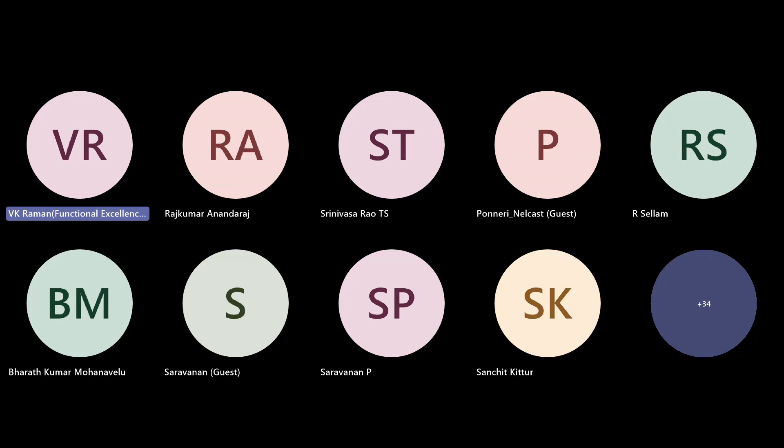He is a member in Indian Institute of Metal, Technical Committee member of Institute of Indian Foundrymen Coimbatore Chapter, Environmental Committee and Executive Member of Coimbatore SIDCO Industrial Estate Manufacturer Association, Member of Program Advisory Committee of Department of Foundry Technology PSG College, member of Board of Program Advisory Committee of KPR Engineering, member of Board of Program Advisory Committee of SNS College of Engineering, and Management Committee member of SCE Engineering Chapter.

He has almost visited across the globe: USA, Germany, Italy, Czech Republic, France, Sweden, Norway, and Denmark. He has got the interest of learning and teaching solidification science of metals. So there is no other leftover, sir, all the areas are covered. So now I request Dr. Saravanan sir to take the presentation thereon. Thank you, sir.

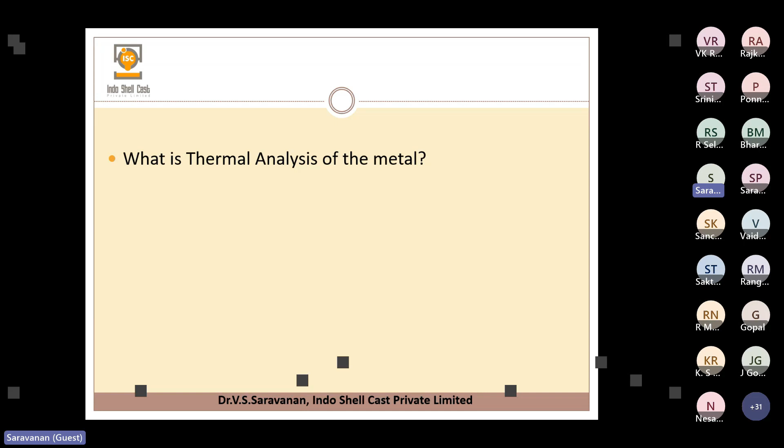So what is actually a thermal analysis? It is nothing but analyzing and predicting the solidification behavior of the metal through interpretation of shape and arrest points of the cooling curve of the solidifying liquid metal. So this is a small definition. Here again there are some wordings, some solidification behavior and then cooling curve. So what do you actually mean by the solidification behavior?

This cast iron, particularly ductile iron, is a very sensitive metal towards process parameters, so sometimes we cannot predict its solidification. Even in an established process, all castings may come out okay one time, and another time we get 10%, 20% shrinkage, even though the process parameters look the same.

We could not find out the exact reason for this shrinkage. Basically, if there is any shrinkage issue, we analyze the gating system, the risering system, increase the riser, change the sleeve, something like that. So it is a real headache for the engineering department. But what has created this shrinkage issue?

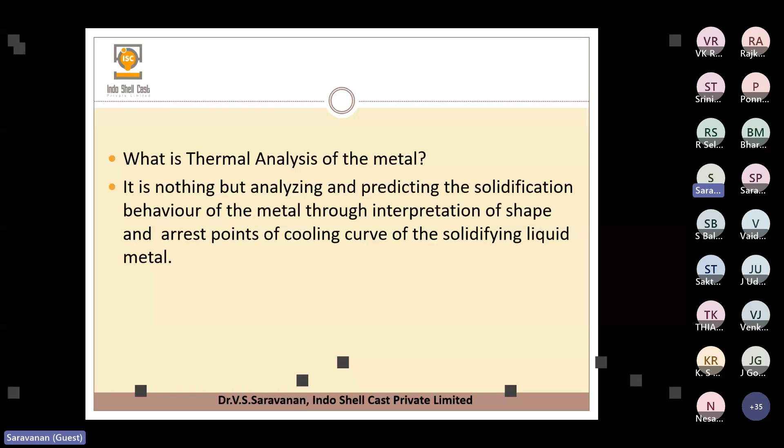For that we need to closely work with this software. Many foundries, when they initially bought this thermal analysis software, put the metal into the cup and it showed some reading. The analysis shows it is good, but actually they get a problem. So immediately we lose faith in this software. But it's not like that - we have to work with the software, fine tune it, adjust the slopes according to our metal, and then slowly start our prediction. This is the thermal analysis and the problems we face in foundries.

We have almost all the foundries having the spectrometer, which gives all the chemical composition. Yes, of course it is very important. The quality of the metal and solidification behavior is mostly related to the chemical composition. As carbon and silicon increase, the solidification pattern will change. So that is one thing.

But apart from that, sometimes even if all the chemical composition is as per specification, we will still have problems. What kind of problems? Metal holding due to power cuts - it is unavoidable, and it will affect the quality of the metal. How to improve the quality of the metal to some extent, because once the metal is deteriorated we cannot bring it back to the original, but we can improve it to some extent.

Sometimes metal holding happens because of other reasons - maybe molds are not ready when the metal is ready, or there are breakdowns, or the operator is not available at the time of metal readiness, so they search for persons inside. Sometimes this happens during the night shift. These kinds of delays will happen, and this will actually deteriorate the metal quality.

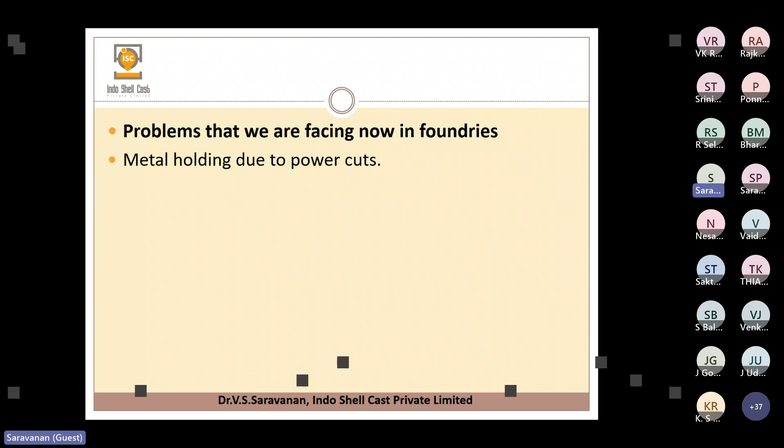Sometimes the chemical composition correction also delays the metal preparation. We want to correct the metal as per the chemical composition requirement, so we need to add some alloying elements, correct the metal, and again do the spectro result. This will actually take some time.

Then there's superheating of the metal - this is a very important thing. We should not superheat the metal because it will kill the nucleation potential. Sometimes we don't know whether we are superheating the metal or not. Maybe 1500 is the optimum temperature, but it goes up to 1530. We don't know whether the metal reached 1530 until we measure the temperature. Then we reduce the temperature to 1500 and start pouring or treating the metal. But having reached 1530 has already killed the nucleation potential. Reached is reached - so how to control this and how it has affected the nucleation potential is one area.

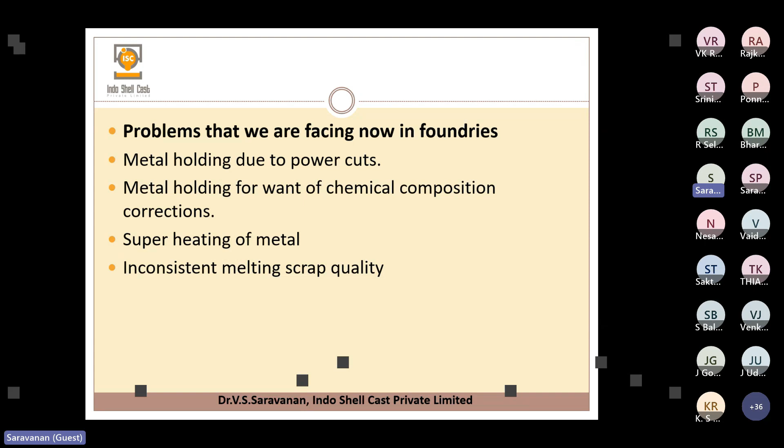Then there's inconsistency of quality scrap. We are buying scrap from different sources, so we do not know the quality, because even checking the chemical composition only gives the important elements - maybe 20 or 25 elements. Apart from that there are many other things. Even the recycling - how many times the scrap has undergone recycling - we don't know. These things will affect the quality of the metal. Sometimes we put rusty scrap also. Normally we put shot blasted scraps, including runners and risers.

Sometimes if it is CRC scrap or rusty scrap, we don't know what's in it. We have to put it as is, and the scraps will have not only rust but sometimes some coatings also. So once we put the scraps inside the metal, only then we come to know there are some coatings, because of the fumes and different color flares, all those things.

And then poor melting practice - from the charging sequence, how to melt. We should not do very fast melt rating, all those things. So charging sequence is also important - how to add the charge material, where to add the carbon, silicon, all those things. And the inoculation practice, how we are doing it - these things actually decide the quality of the metal.

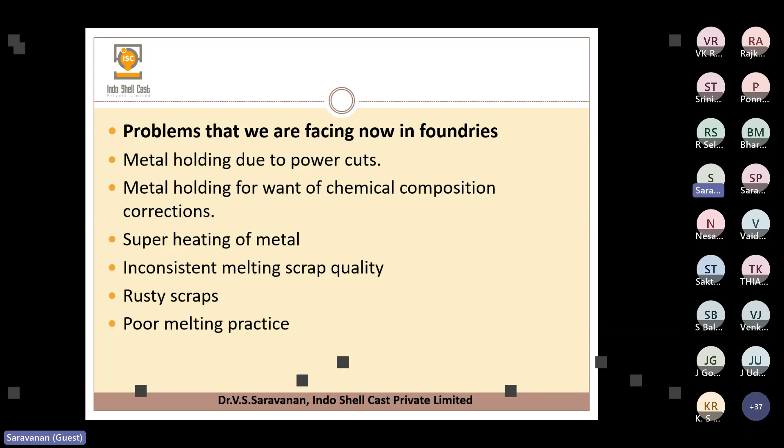So these things actually will not reveal in our spectro analysis. Spectrometer tells only the chemical composition. So here, we can find out these things to some extent with the thermal analysis software. All these inconsistencies will give these results.

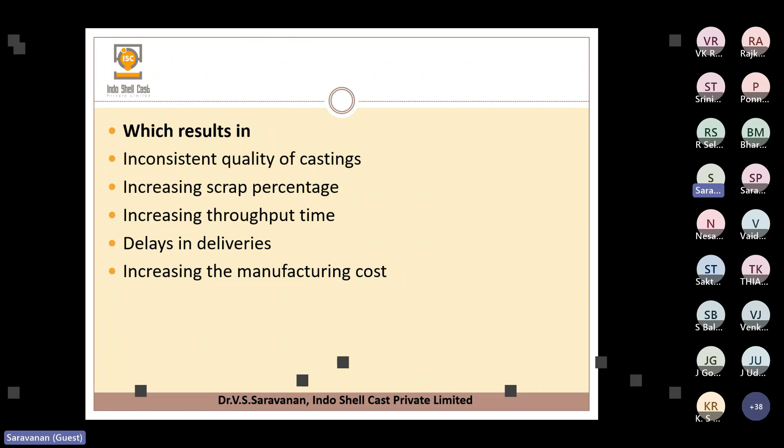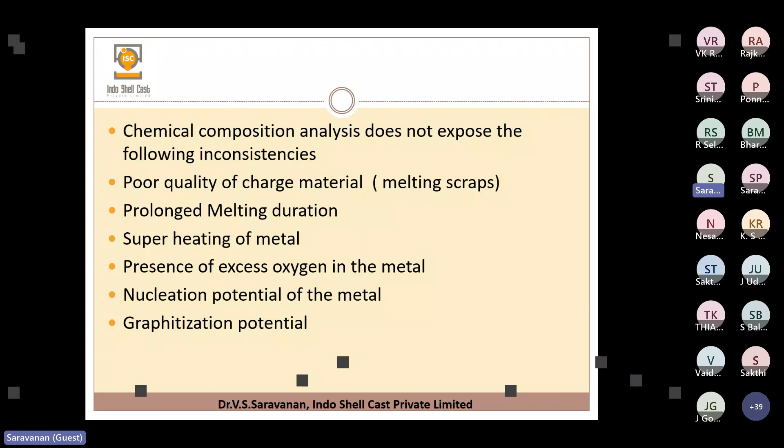So inconsistent quality of castings, increasing scrap percentage, increasing throughput time, delays in deliveries, increasing manufacturing cost - these things. Chemical composition analysis does not expose the following inconsistencies: poor quality of charge material, prolonged melting duration, superheating, presence of excess oxygen, nucleation potential, graphitization potential - all those things, it will not come in spectro analysis. So we can get the answer to all these things from the thermal analysis software.

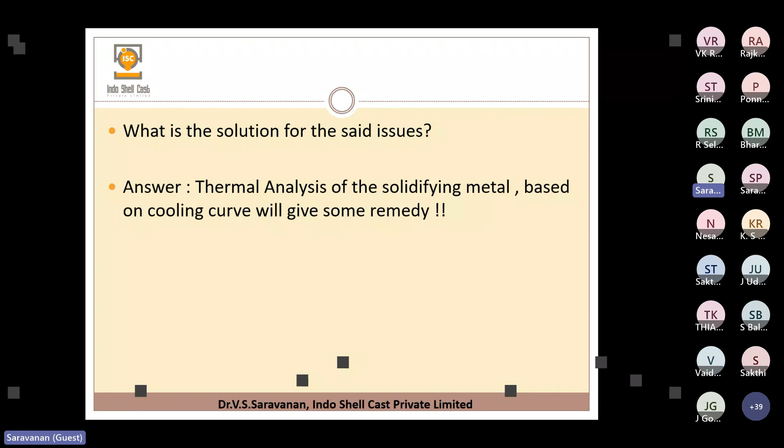So now what is thermal analysis software? Actually this is a little bit like a CE meter. We are using a pouring cup - we pour the metal into that, and there is a small thermocouple inside.

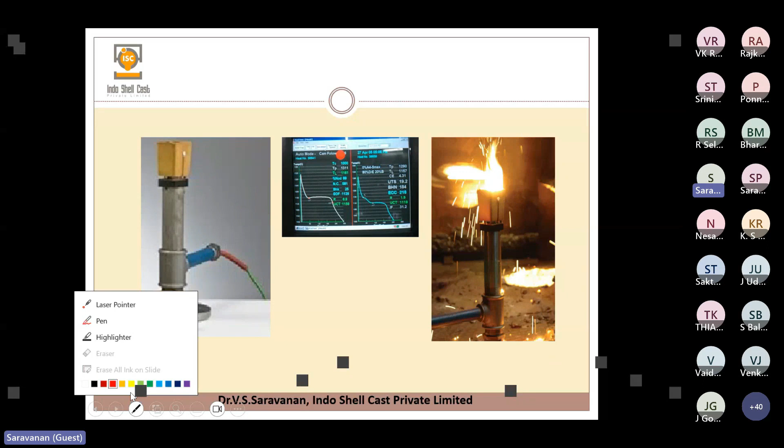So the thermocouple will generate millivolts. This millivolt signal is converted into a digital thing, and we take it into the software, and the software will plot the cooling curve according to the millivolt generation. For each millivolt there is a standard temperature, and based on that they plot the curve.

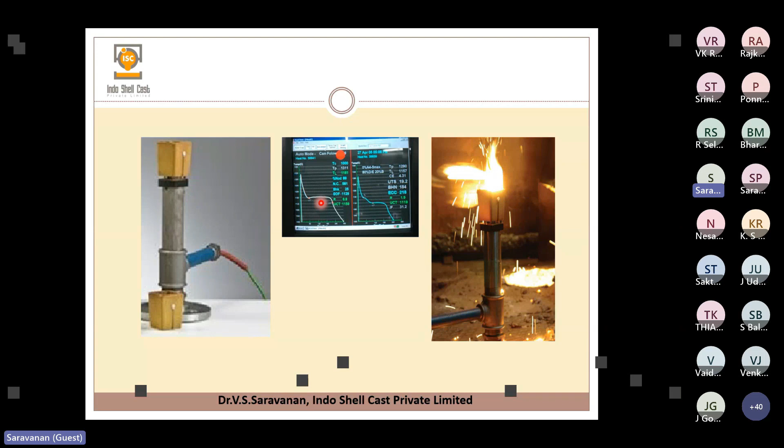So the shape of the curve, how it is, what is the time taken, and where the arrest points come - based on that the software gives a lot of inputs for us. By studying these inputs, we can predict and tell the nucleation potential of the metal to some extent.

So this is actually the thermal - this is the thermocouple. There are two types of thermocouple cups: one is the plain, and one is the tellurium coated cup. Once we want to check the base metal analysis, we have to use the tellurium coated cup.

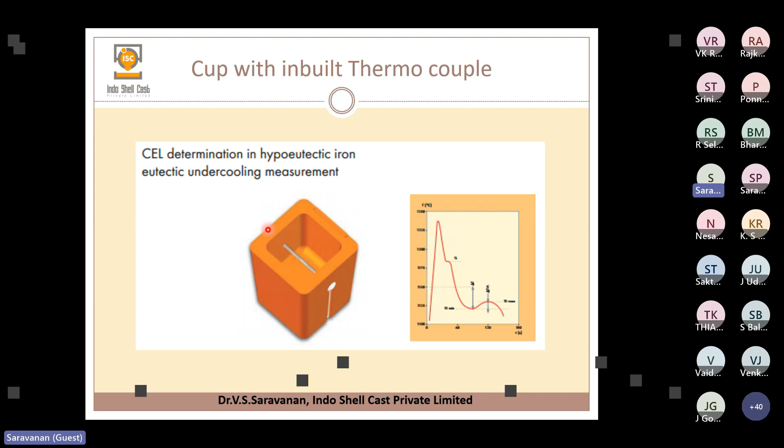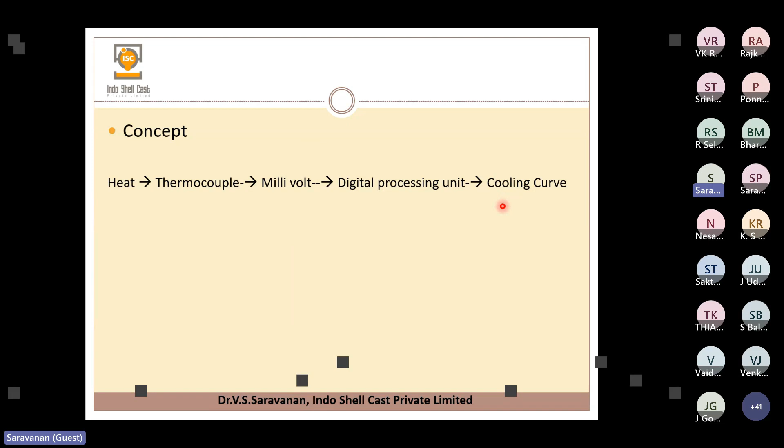So once we pour the metal, it immediately cools because of the tellurium - it forces the cooling, and then we can get the base metal readings. So the concept is the heat generated inside the thermocouple - the thermocouple produces the millivolt, and the digital processing unit converts the millivolt into a temperature scale, and plots the cooling curve.

So this is the general cooling curve, for the pure metal. For pure metal we have only one point - the melting point and the freezing point are both the same.

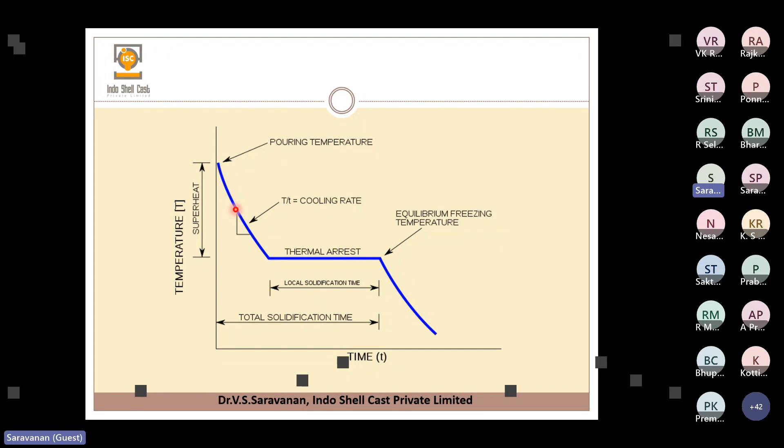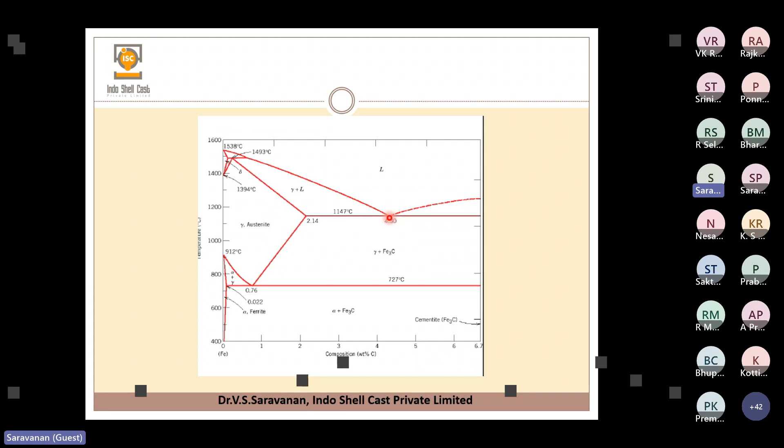So I will just skip here. You can see this is actually the 4.3 eutectic, and this is 1147, this is the eutectic temperature, and this is the eutectic composition. So the thermal analysis and all these things are derived based on this carbon equilibrium diagram.

So now, before going into the thermal analysis software, let's look at the solidification - how it is happening inside the metal, what are the phases. Once the metal is ready in the liquid state, in the course of time more nuclei will form. So as the nuclei form, the metal slowly loses its kinetic energy, because the more amount of elements inside the metal, it is moving very fast.

When the temperature increases, the movement is very fast. Once the temperature goes down and down, the kinetic energy between the elements slows down, and they come close together and bind each other - because as we studied in schools and colleges, ionic bond, covalent bond, so many things - whenever the atoms come close to each other, they bind and create the solid phase.

So here more nuclei will form, and slowly the nuclei will group together and grow as dendrites. The dendrites will grow and finally become solid, and we can see the grain boundaries also. So our point here is: where does nucleation start, at what temperature, and how much nuclei is actually created inside the metal - whether it is sufficient to continue for the further solidification process. These things are very important.

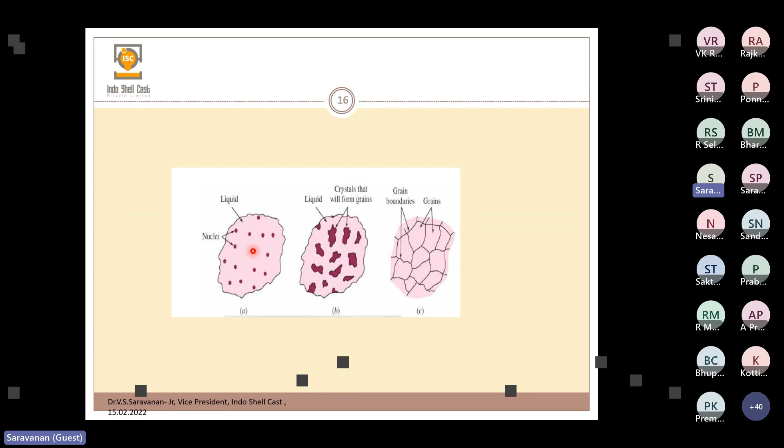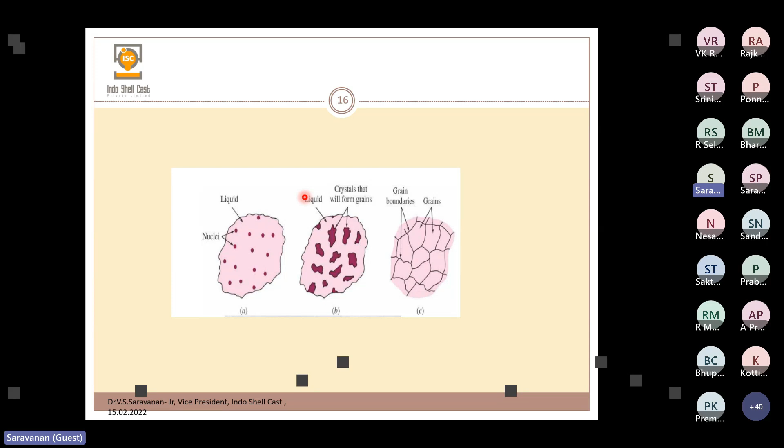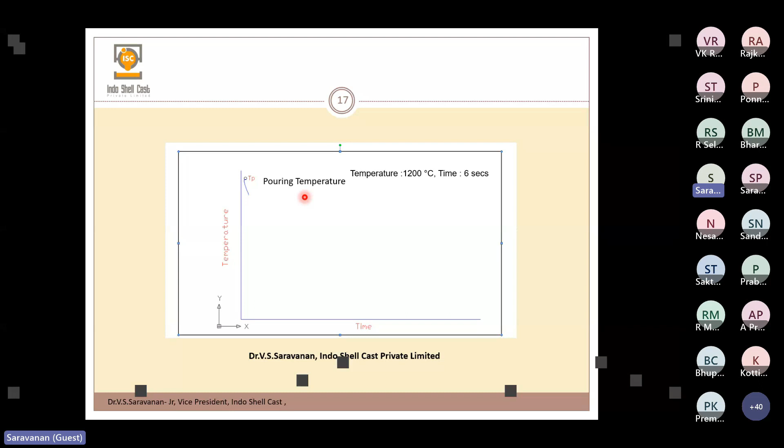Sometimes the metal takes more time for getting nucleation. Then there are problems in quality - shrinkage or porosity will come. So once you pour the metal, for example into a cup, at the pouring temperature you can see the arrest points. I already told you about arrest points - it is actually a constant temperature at that particular point. There is only a phase change, no change in temperature.

So in the cooling curve, it will show only the arrest point, like this. But if you enlarge that particular time, if possible - normally the cooling curve software cannot zoom it, but if you are able to zoom that particular point, you can see a small straight line, because there is only a phase change, no temperature increase. Like when boiling water, once it reaches 100 degrees centigrade, the boiling point, the temperature remains constant and only the water becomes steam.

So like that, a small phase change happens here because the metal becomes a small solid phase. The temperature remains the same, but this particular point, the pre-arrest point, is not permanent. Once a small amount of nuclei is formed everywhere, the latent heat liberation takes place, and then again the temperature of the metal goes up a little bit, and then it dissolves again.

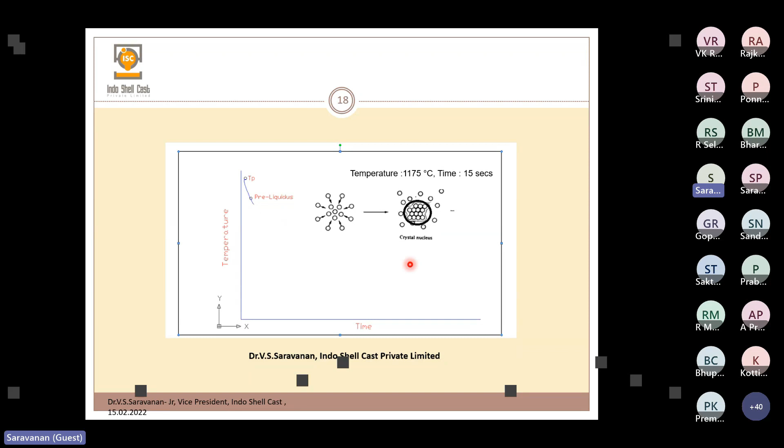So that is called here. This is not a permanent one - this particular pre-liquidus arrest point. So this is actually called the pre-liquidus arrest. What happens here is once the nuclei form, it will dissolve again at this particular point.

This pre-liquidus arrest point shows excess oxygen sometimes. The source of oxygen can come from rusty melting scrap, furnace lining, coatings, or moisture somewhere.

If excess amount of oxygen is there, the metal cooling curve will show this small pre-liquidus arrest point. So if we have the pre-liquidus arrest point, it shows more amount of oxygen, and we have to remove the oxygen by adding deoxidizers.

So this is one important thing - excess oxygen is not desirable. If there is excess oxygen, maybe 100 ppm or something like that, it will create issues like taking more magnesium during magnesium treatment. Magnesium oxide inclusions will come, magnesium pickup will not be there, and the nodularity percentage may come down. Sometimes gas defects, micro gas porosities inside the metal will also occur.

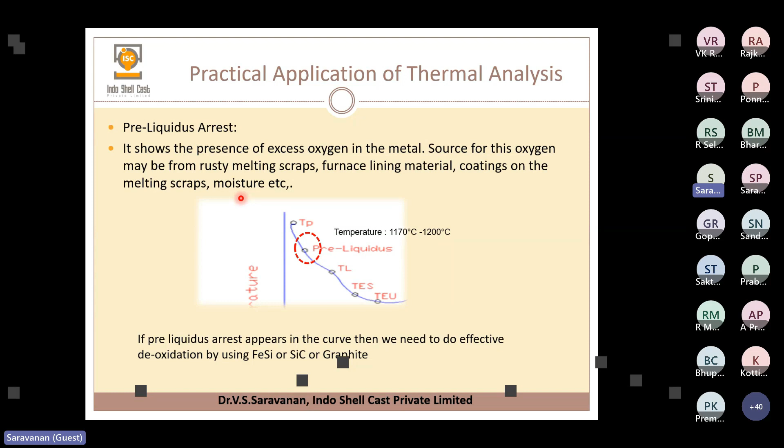So we have to carefully arrest this, remove this pre-liquidus arrest, and take care of the scrap and all those things. Then as the temperature keeps coming down, one more arrest point will come.

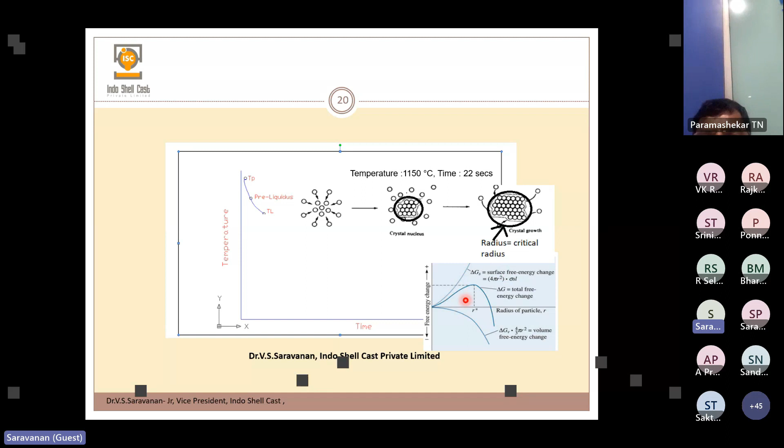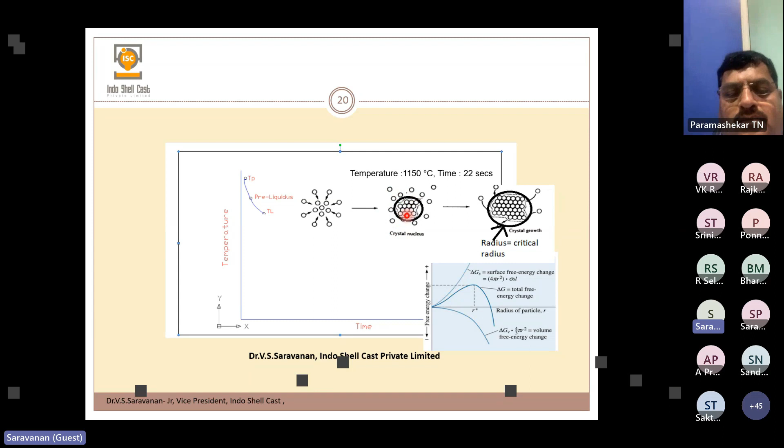Once the nuclei form, all the nuclei atoms come close together and form a big nucleation site. This is actually the critical radius - once the critical radius is formed, it becomes stable. Up to this critical diameter, if it forms smaller, it will dissolve again, but at this point it becomes a stable nuclei. This is called TAL.

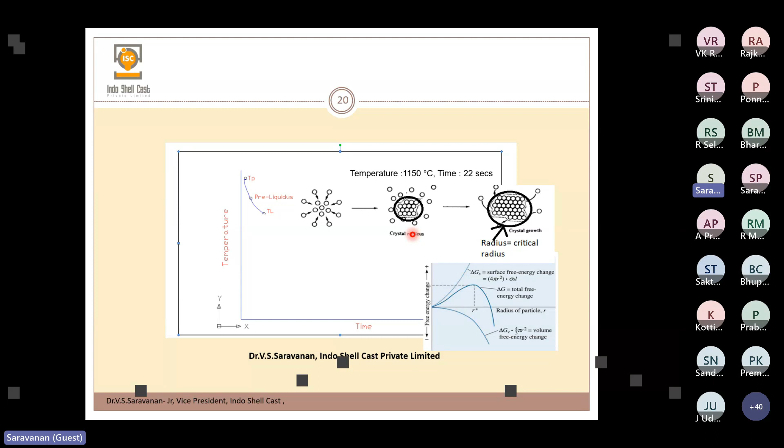So what happens here is the first nucleation sites form and then start growing slowly. There are two types here: hypereutectic and hypoeutectic. Hypereutectic means the first solid may be graphite, while hypo means the first solid may be austenite. So austenite tends to precipitate and then starts growing slowly - this is TL, the liquidus point, growing slowly. This is also the dendrites going in all 360 degree directions as it grows.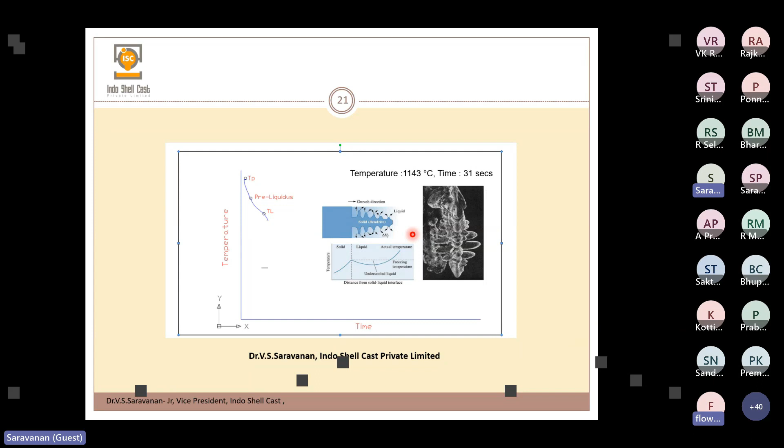The early liquidus arrest promotes the possibility of forming surface skin, because early liquidus arrest means more austenite will form, leading to chances of getting surface shrinkage defects. How to bring down these things, we will see later.

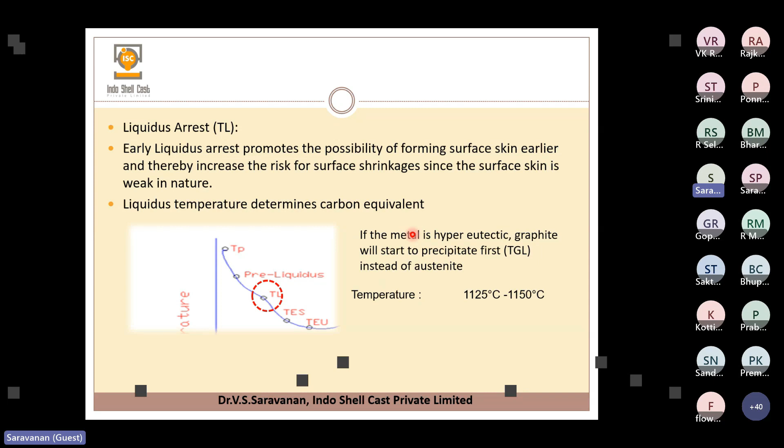This liquidus temperature is actually derived from the carbon equivalent. There is software with a lot of formulas - based on the temperature and the carbon at that particular time, they create these arrest points. From this arrest point we can also calculate the carbon equivalent, vice versa. This will form between 1125 to 1150. The early liquidus temperature indicates low carbon equivalent and the presence of insufficient active carbon, because at that time the first austenite started growing.

For hypereutectic, the first graphite starts precipitating at this particular point. 80% of the graphite starts precipitating between TL and TER - I'll explain TER later. The remaining 20% forms between TER and T solid, meaning after completion of solidification. So how much graphite precipitates between TL and TER, and how much between TER and T solid - these things determine the quality of the casting.

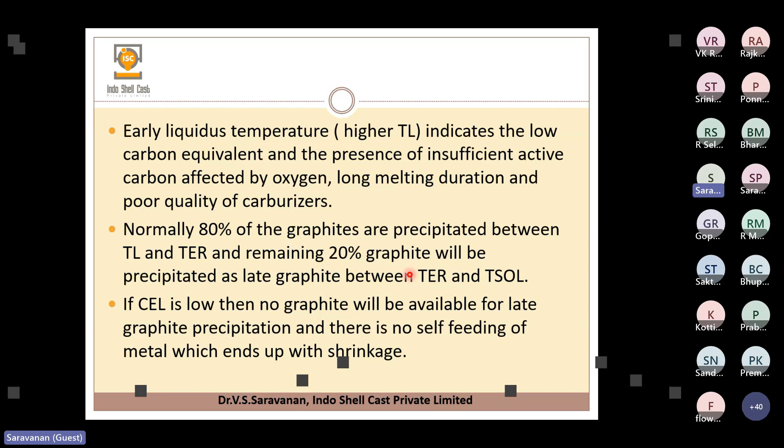So these are all the indications with TL. A high TL value indicates low carbon equivalent, and a very low TL indicates high carbon equivalent, so there is a chance of graphite flotation also. Sometimes if the graphite addition is not correct, it will also show very low TL values.

So like that, for this treatment between 1128 and 1149, it is a desirable range.

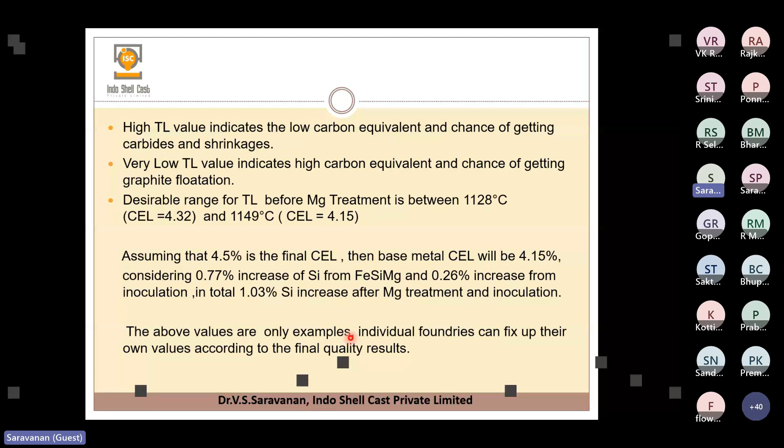After TL, then again comes TES. TES means eutectic start. Eutectic means, from that iron carbon diagram, we can understand that at that particular point, two solid phases start precipitating from the liquid.

So already, at this particular point, if it is hypoeutectic, austenite precipitate starts. Then here, at this particular point, graphite will start precipitating like this. So in between, the austenite is actually coming like this.

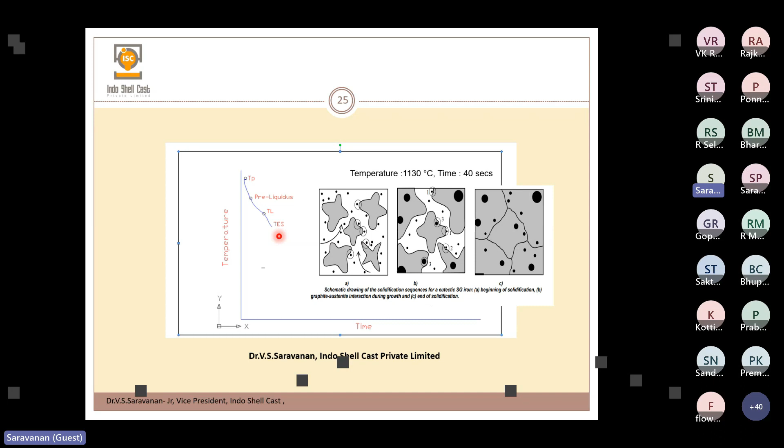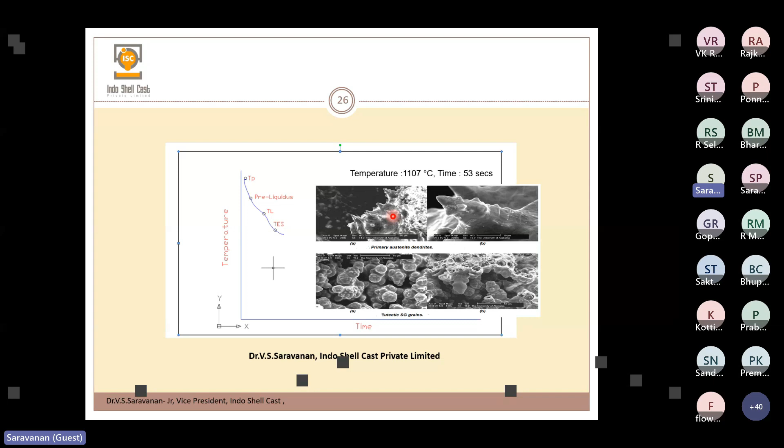So at this particular point, two solid phases will start precipitating: one is austenite and one is graphite. So the austenite will start growing like this in dendrites, and in between the dendrites, graphite will start precipitating and come down inside. It will settle inside the nucleation. This is dendrites, and this is actually the nucleation austenite cell.

So again, once the graphite starts precipitating, the austenite will form over this graphite also, like this. So one side it is growing like this, and on the other side, over the graphite, it is forming like this. So all areas actually start precipitating.

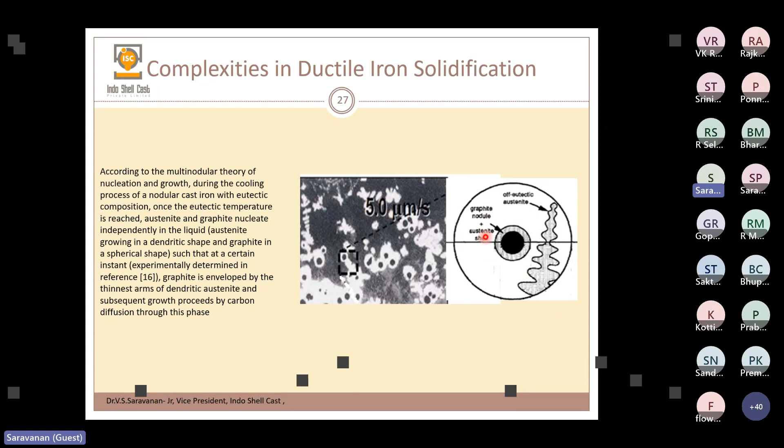So this is actually the hypoeutectic liquidus. From the liquid, the austenite precipitates, and then the graphite coming, that is TES. So that is hypoeutectic. Then at the eutectic point, both austenite and graphite simultaneously precipitate.

So hypereutectic means first the graphite will start precipitating and then austenite will start precipitating. So these are all the things. This particular thing happens at TES.

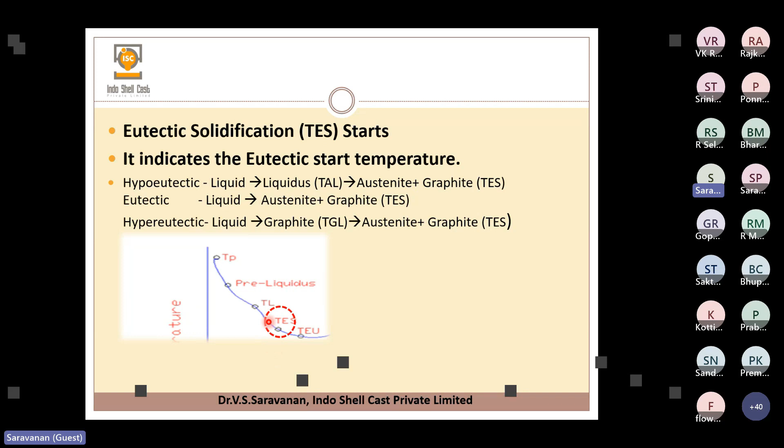And then TEU, that is the undercooling. Here, almost both things start, the 80%, what I told, so it is actually 80-70% of graphite and austenite that is precipitated here, at TEU. So the difference between TL, TES, and TEU is actually very important.

So what is the gap between that? What is the temperature difference between TL, TES and TEU? If it is very close together, then the metal is actually good. But if there is a temperature difference and the TEU is taking a very long time, then there are chances of getting shrinkage or carbide, all those things.

Okay, so you can see the graphites inside, in between, because of austenite.

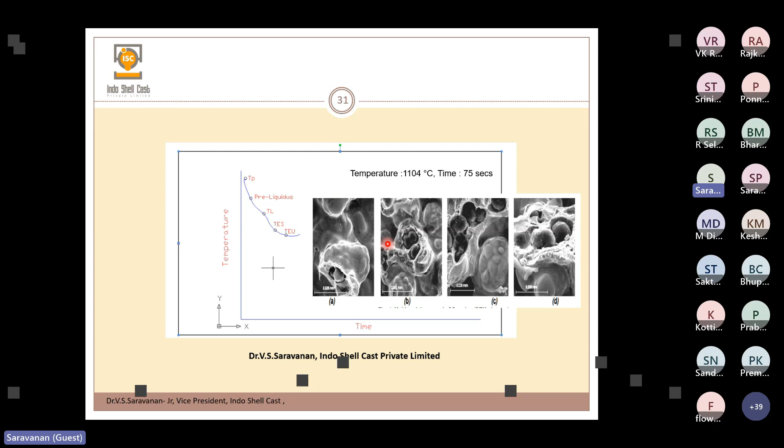So here, some of the elements... Doctor, your voice is disconnected. Saravanan sir, not able to hear you. Yeah, I think you have put the mute on me also. No. So now is it okay? Sorry, now it's okay, now it's okay.

Okay, thank you. So here, while we are talking about TEU, the TEU should fall between this graphite eutectic line and the carbide line. So here, these things, in the software, they put all these formulas and based on that only they are giving the prediction.

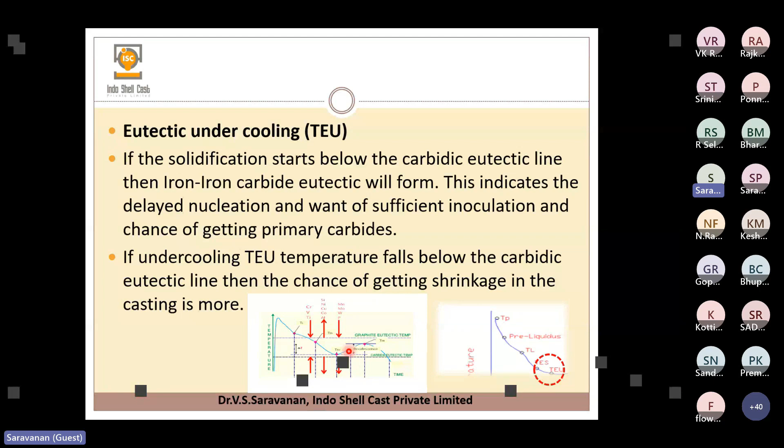So if the solidification starts below the carbide eutectic line, then iron carbide eutectic will form. This is the carbide eutectic line, and this is TEU. So if the solidification goes below this, there are chances of getting carbides, and sometimes even porosity, because the nucleation potential is not good. So if the undercooling TEU temperature falls below the carbide eutectic line, then there are chances of getting shrinkage also.

After magnesium treatment and inoculation, TL, TES, and TEU are expected to come to the same value, or at least show only a small difference between these temperatures. If the temperature difference between TES and TEU is more, the nucleation potential may not be good, and we need to add more inoculation.

After TEU, all the graphite actually precipitates. During graphite precipitation, latent heat is liberated because it releases more heat. So inside the metal, millions of nuclei or graphites are precipitated, and because of that, the overall metal temperature goes up slightly, so the curve rises a little. How much this temperature rises is very important.

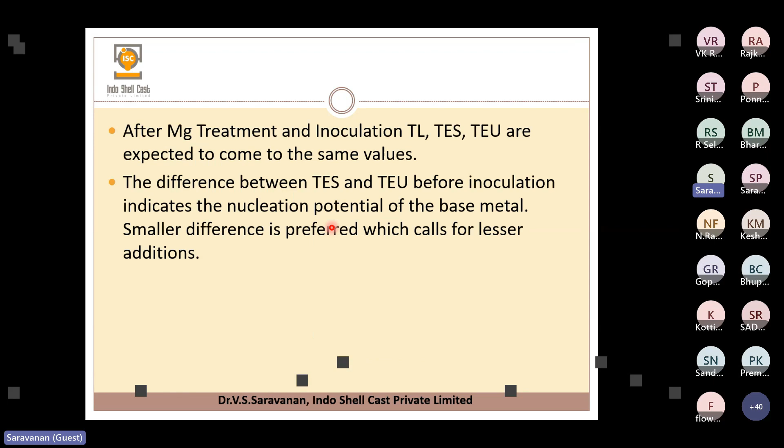After reaching a certain temperature, it stabilizes again. That particular point, and its temperature, is called TER. The difference between that and the previous point is called recalescence.

Based on this recalescence, we can adjust the inoculation quantity, how much nucleant we are adding, because many foundries add a constant percentage of nucleation, maybe 0.3% or 0.2% for gray iron and 0.4% for ductile iron. This is almost constant for everything, invariably.

But by actively using thermal analysis, we can adjust the inoculation a little, because if the metal already has a very good nucleation potential, sometimes there's no need to add more inoculation, so we can reduce the inoculation percentage. All these calculations are based on this recalescence.

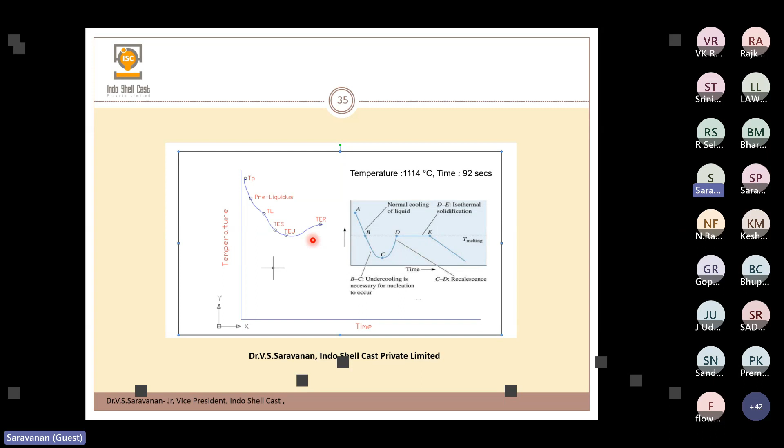This recalescence is actually the maximum eutectic temperature minus the minimum eutectic temperature - that is the recalescence.

Normally, if the recalescence is above 7 degrees centigrade, the iron is less inoculated. Up to 4 degrees, it's okay. But if it's more than that, there is a problem.

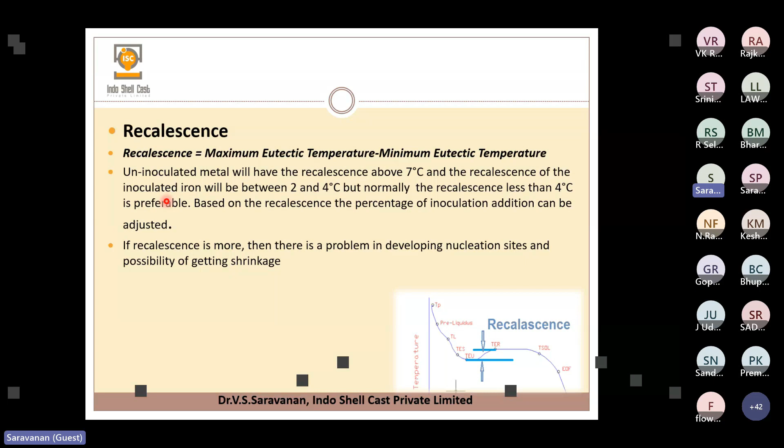After recalescence, the metal temperature becomes stable. Why? Because the temperature continuously drops as time goes on, but the heat liberation and the temperature drop become almost equal, so it becomes stable at this particular time, and the cooling curve shows a straight line.

What is the length of this straight line? Some software will show the length of the straight line, and some software will show the area between this particular point and T solidus - the point of complete solidification of the iron metal. Based on the area between TER and T solidus, they can predict the solidification behavior of the metal.

T solidus is the complete solidification of the iron metal. At this particular temperature, many low melting alloys are still present - copper also has a slightly lower melting temperature than iron, along with chromium, moly, or tin, whatever it may be. These elements may still be in liquid form at this point, which is why T solidus only shows complete solidification of the iron metal itself.

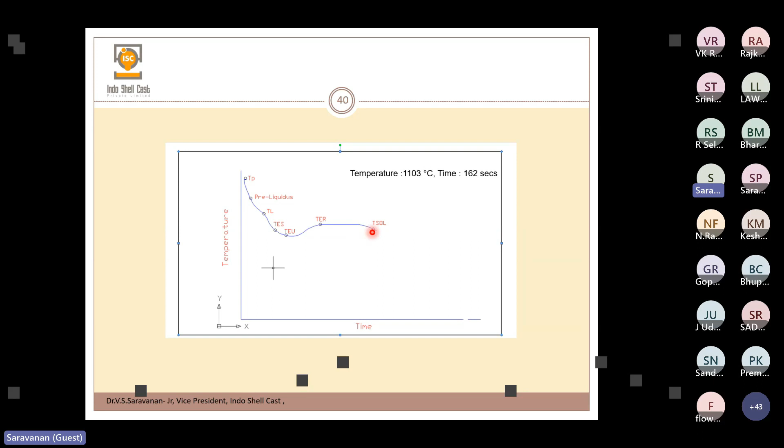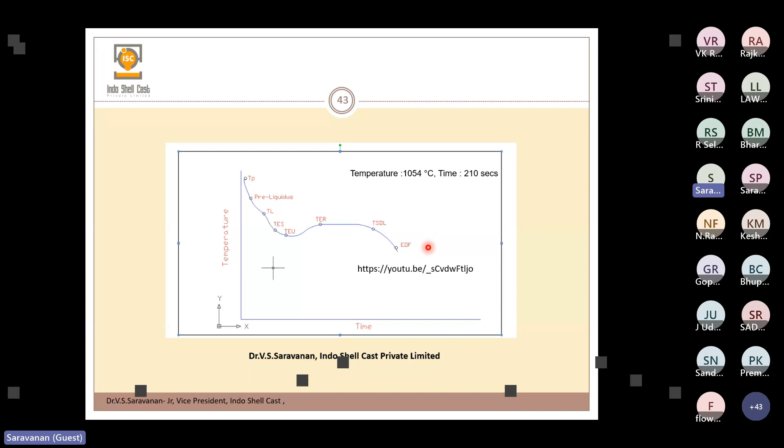So some of the low melting alloys are still in liquid form, and will continue solidifying as the temperature goes down further. This is the end of freezing - the point where the complete metal, including iron and other low melting alloys, all becomes solid.

The temperature difference between T solidus and the end of freezing point matters. If the end of freezing range is more, it indicates we are adding more low melting alloys, like manganese, chromium, tin, copper, and so on.

Sometimes it will deteriorate the metal, because these low melting alloys will solidify late, and then they go towards the grain boundaries and settle there in carbide form—maybe vanadium carbide, chromium carbide, titanium carbide, whatever it may be. The amount may be very less, but it settles as metal carbide, so the grain boundary becomes very weak. Then we won't get the desired tensile strength, even if we add more manganese, tin, copper, whatever it may be. That is because of the enrichment of alloying elements at these grain boundaries.

Because solidification takes place at the grain boundaries with these low melting alloys, contraction happens, and these low melting alloys develop small amounts of micro porosities—very small micro porosities at the grain boundaries. This again reduces the tensile strength of the metal. So we should be very careful in adding low melting alloys. Mostly, we have to adjust the metal to achieve mechanical properties by adjusting the carbon and silicon—that is very important here.

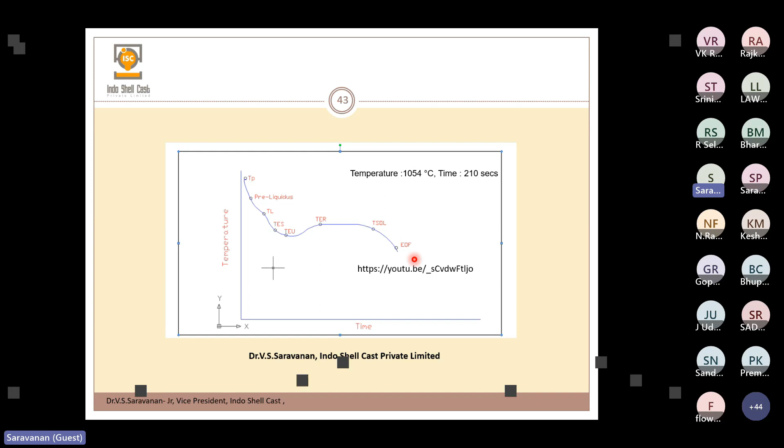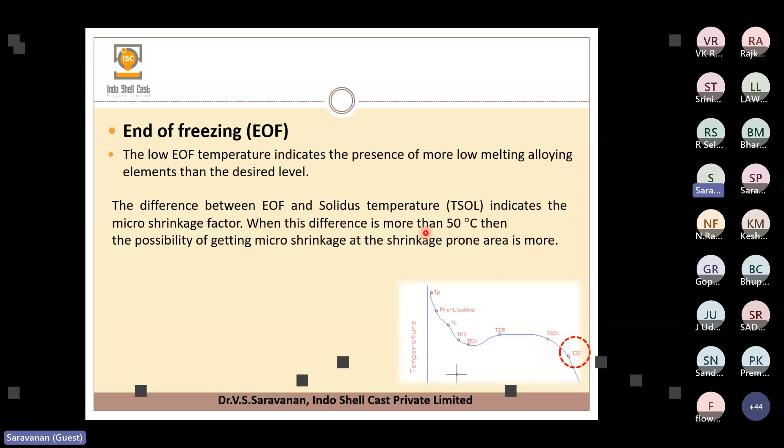So here, the end of freezing and T solidus—when the difference between them is more than 50 degrees centigrade, there is a possibility of getting micro shrinkage, because it shows more of the low melting alloy segregated at the grain boundaries, and chances of micro porosities. So that is actually the end of freezing.

So what I told—here there is the length, how much length it is traveling, and how it is flat, so it decides. The curve shows how much early graphite precipitates and what is late graphite precipitation. Early graphite precipitation is more hypereutectic, and you can see the graphite size a little bit more in the metal. So here also, it is the hypereutectic early graphite precipitation—you can see the graphites a little on the bigger side, and this is eutectic, meaning it is almost uniform graphite size.

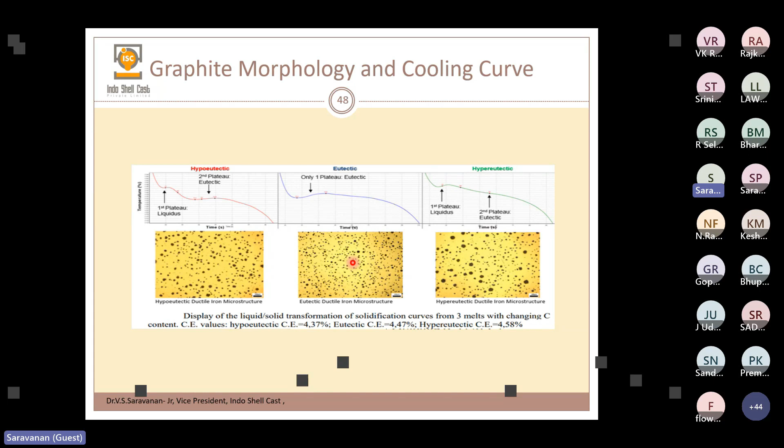From the graphite also we can see which is the hypereutectic metal and which is the eutectic metal, and the thermal analysis curve shows that particular thing. One more thing—this is the graphite eutectic temperature, and this is the carbide temperature. They derived this particular line; actually it's a virtual line, a virtual boundary. This is the formula they have for that. In this boundary we need to have this TEU and TER. If it exceeds here like this, then there is a problem.

Some elements push these grain boundaries—the graphite eutectic temperature line and the carbide eutectic temperature line. Chromium, vanadium, titanium push them towards each other, narrowing the range down. Narrowing down means automatically the TA will go down, so this is not desirable—that is the addition of chromium, vanadium, titanium. If the content of these elements in the metal is more, then we will have a problem in the metal.

Silicon, nickel, copper, cobalt, aluminum widen the range, so it is good—if it is widened, automatically TEU will come inside, so they say it is good. Some elements push both lines simultaneously—manganese, moly, tungsten, phosphorus—that is also not good. So the first not-good group is chromium, vanadium, titanium; the second is manganese, moly, tungsten, phosphorus; and the widening group is good.

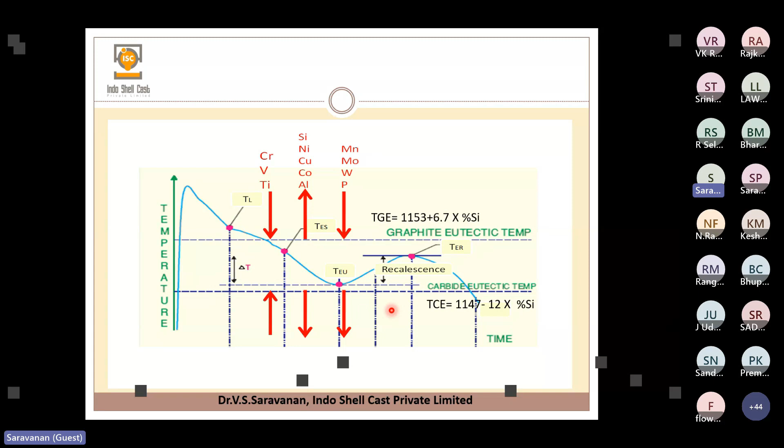Regarding the inoculation addition, as I told you earlier, we can adjust the inoculation percentage based on the recalescence. For example, the inoculation required equals the measured recalescence minus the target recalescence, multiplied by the inoculation factor.

So the inoculation factor is weight of the inoculant added divided by delta R. Delta R is nothing but the recalescence before inoculation minus the recalescence after inoculation. For that, we have to take a minimum of 10 to 15 trials at least to fix the inoculation factor. That is very important. More trials will give a more accurate inoculation factor.

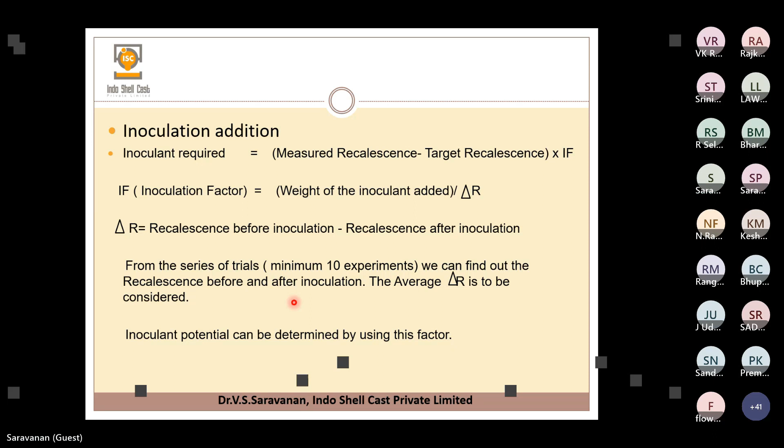Based on that, we can predict. For example, assuming our delta R, that is recalescence before and after, is 5 degrees, and the inoculation added is 200 grams, that is about 0.4 percentage for a 50 kg ladle.

So the inoculation factor is 200 grams divided by this delta R, that means 40 grams per degree C. So per degree C, to adjust per degree temperature, we need 40 grams of inoculation. That is about 0.08 percentage per degree centigrade.

So to get the desired recalescence, assuming the obtained recalescence is 8 in one particular heat, and our target is 4, so I want to reduce 4 degrees, we take 8 minus 4 into this inoculation factor, so then 160 grams is required. This is how we calculate based on the recalescence and the inoculation factor.

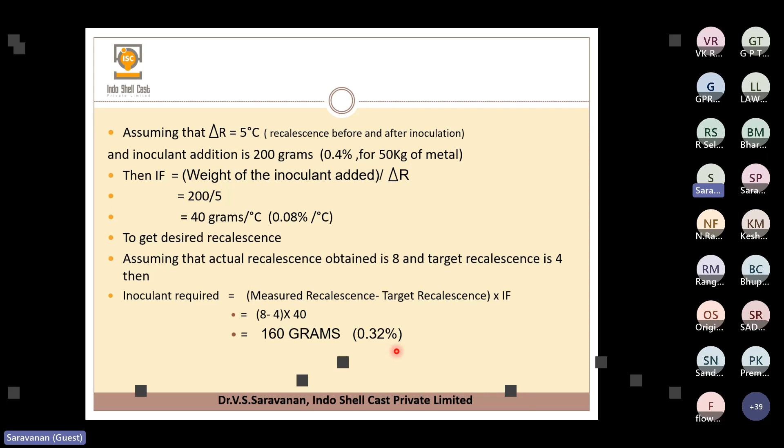So we can adjust the inoculation factor, and we can adjust the inoculation quantity dynamically according to the delta R, that is the recalescence. If already the recalescence is very good and less, then we can reduce the inoculant.

At that time, the metal is almost in semi-solid condition, so there the graphite precipitation will take place. The solid diffusion of graphite will take place here. Because of that solid diffusion, it actually pushes the metal, because the graphite density is less but it occupies more space, so it pushes the metal. At this time the metal is in semi-solid condition, and because of the pressure developed inside, it is about 50 bar pressure inside.

So the graphite precipitation force can push the metal a little bit. At that time, even small voids inside the metal can disappear. That is why the late graphite precipitation is very important here.

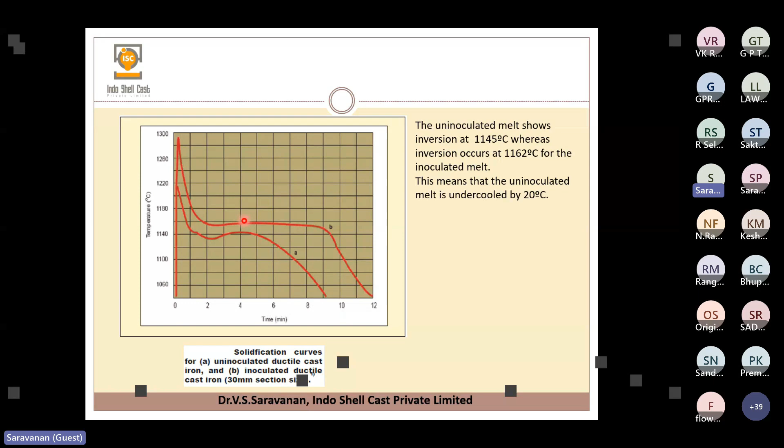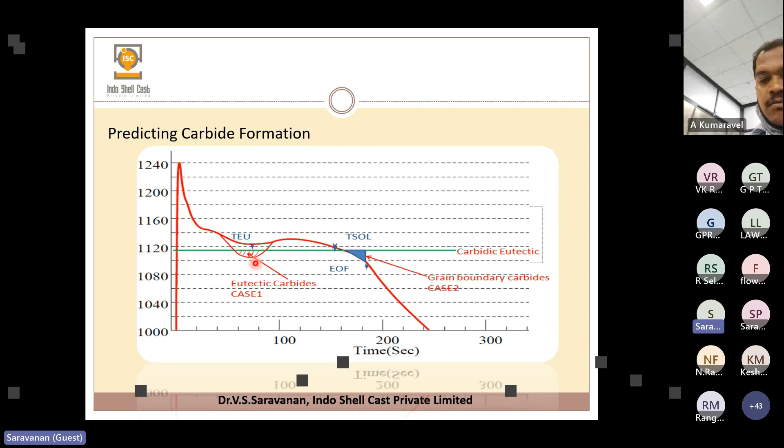These are some examples I'm putting here. So this is the carbidic line. Sometimes if the TEU goes down instead of like this, then we will get problems related to carbide. Sometimes it shows the nucleation is also not good, so it actually takes more time to create nucleation sites, and then again we are getting some porosity related issues also. Then the graphite eutectic line is here, T solid is here, and end of freezing is here. If this particular region is very close, then it is good.

Again if the end of freezing increases, if it is more than 50 degrees, then the low melting alloys segregation and grain boundaries are more, and we will get grain boundary carbides. This particular area is actually calculated indirectly in the software, and they are predicting the possibilities of getting grain boundary carbides like that.

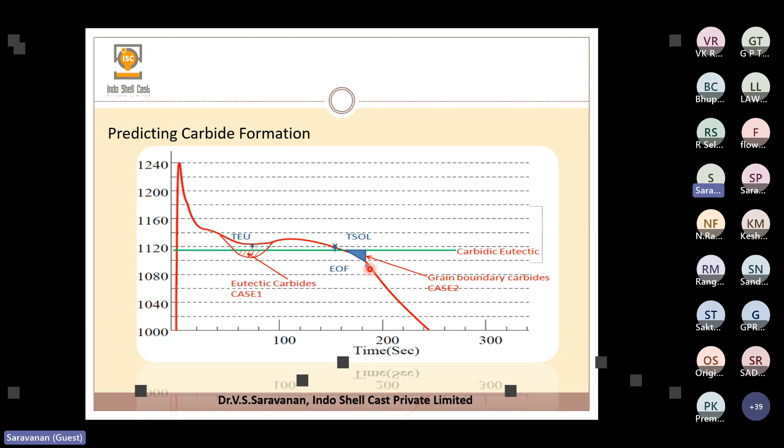Based on that we can adjust the magnesium content also, the magnesium we are adding inside the metal. Sometimes we are adding more magnesium, so that is also not good. If we add more magnesium, from the nodularity point of view it is good, but again it will create a lot of issues like shrinkage porosities. If we add more magnesium, it actually promotes the shrinkage.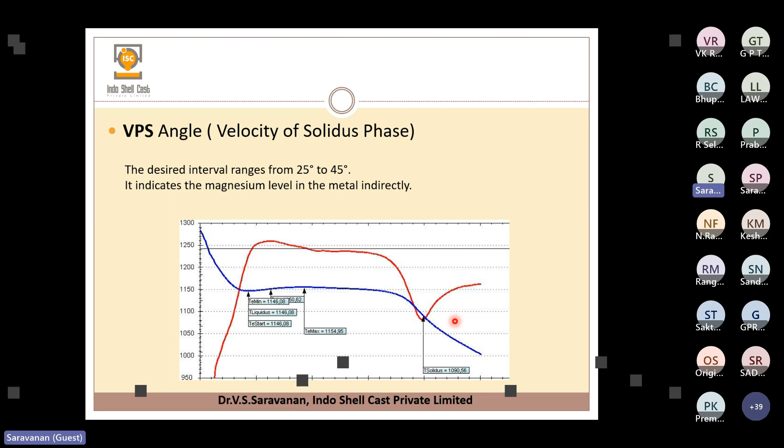Then magnesium related oxides, sulfides, all these defects will come. So we should actually limit the magnesium always to the minimum extent. That is very important. For that, some softwares have the provision of measuring these angles, and then we will limit the magnesium content also. This is the solidification range, what I have discussed earlier, which shows the late graphite precipitation.

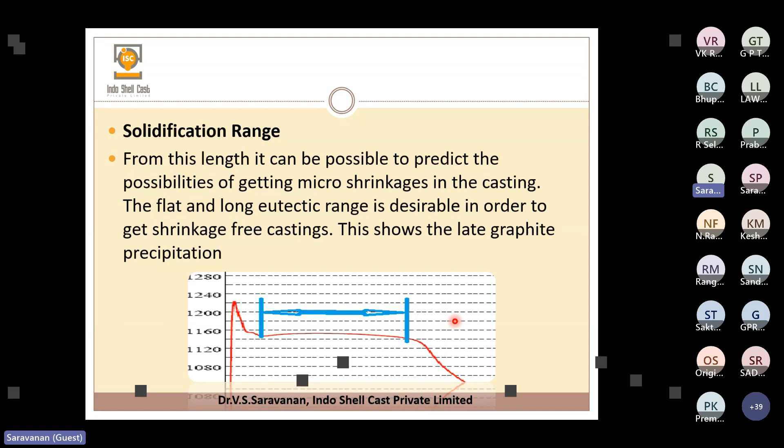So here, for example, if the S1 is more, because the TL and T-low area is more, then what happens is it shows more amount of austenite precipitation. More austenite precipitation means pure iron precipitation is more. Then there is a chance of getting porosity - that is surface shrinkage also.

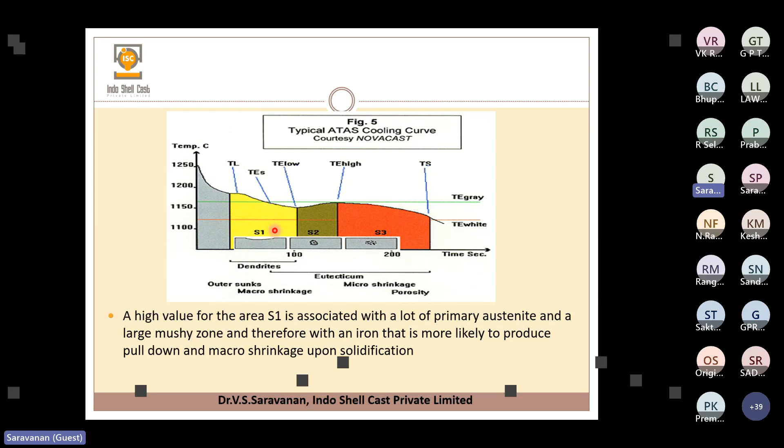So from this area we can predict this thing, and the software will give all the inputs for us to adjust the metal quality.

So like this, studying the cooling curve, we can predict a lot of things from the software, and then we can solve the discrepancy in the metal before pouring. I'm not saying that we can eliminate complete discrepancy of the metal, but we can reduce some discrepancies.

We can improve the quality of the metal, and continuously we are working with the thermal analysis software and fix the software parameters, all those things according to our process nature. Then the reliability of this particular software will be more. So like that, we need to work with the software.

We have to adjust the slope in that particular thing. So the TL values, the T-solidus, all those things - with the help of these formulas which are inbuilt in the software, we can slightly adjust the slope, and then we can improve the values. So then the prediction will become a good reliability for that.

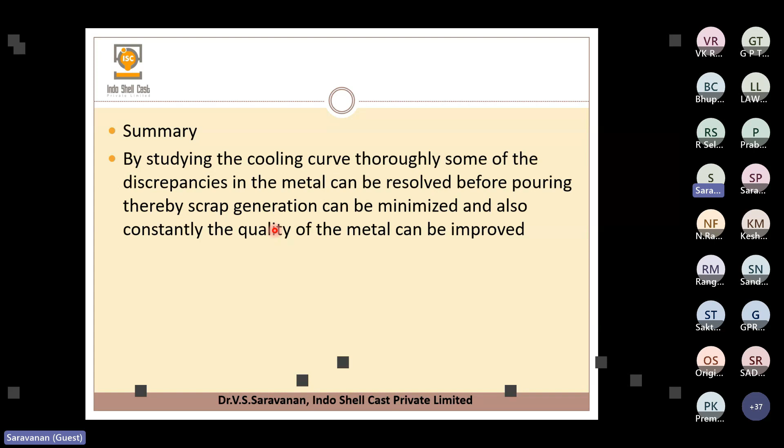So like that, this thermal analysis software will help in improving our metal quality and then reduce our scrap rates. So this is about the thermal analysis software.